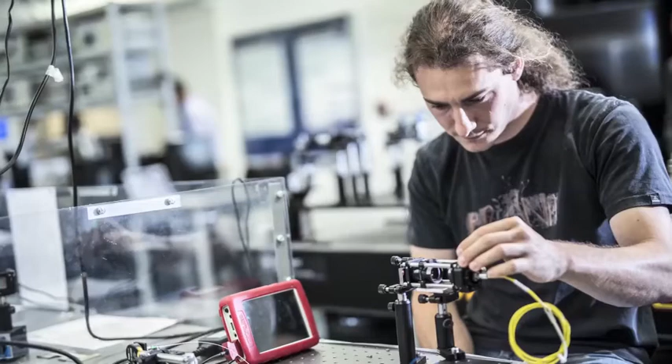Metrology is the science of measurement. The Future Metrology Hub is one of 13 EPSRC future manufacturing hubs and focuses on the measurement of features related to physical manufacturing, such as distance, form and surface characterization.

With over 70 academic and industrial partners, the Hub is active across a wide variety of sectors and works with all types of organisations, ranging from large global corporations through to small independent companies.

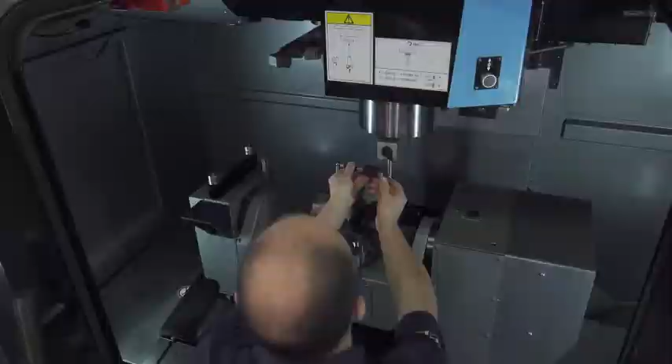Metrology is a key enabling technology essential to the modern world of high-value, high-precision technologies and products.

Accuracy in manufacturing is a fundamental requirement. Sir Joseph Whitworth, a pioneer in the field of precision engineering and standardisation, famously said, "You can only make as well as you can measure."

According to the National Physical Laboratory, traditional product verification processes typically account for 10 to 20% of finished product costs, representing over £15 billion per year in the UK alone, while over 60% of British standards involve measurement or testing.

Based at the University of Huddersfield, the Hub brings together a consortium of world-leading researchers, with spokes at the universities of Bath, Loughborough, Sheffield and the AMRC. The Hub is led by Professor Dame Jane Jiang.

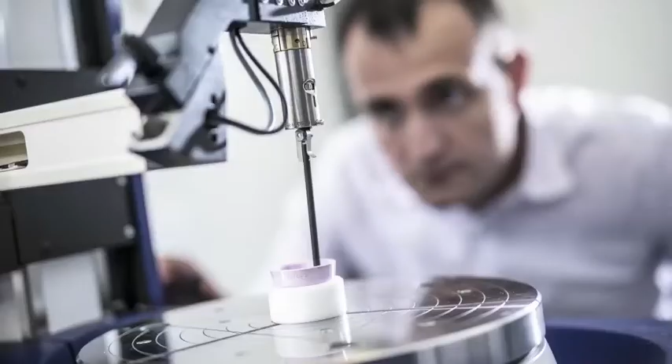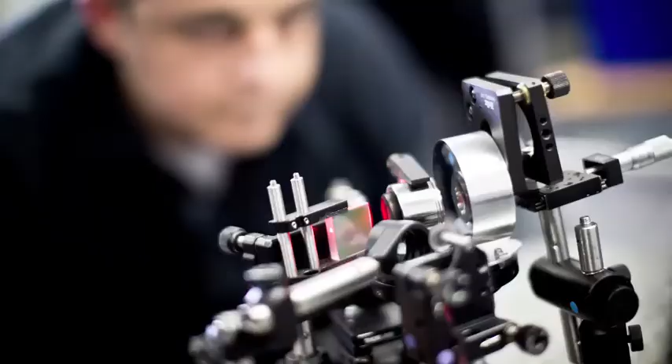The vision of the Hub is to create groundbreaking embedded metrology and universal metrology informatics, and apply these technologies across the smart manufacturing environment. Over the last 3.5 years, the team has been working together, developing fundamental science and technologies, and transforming early-stage outcomes into industry-ready solutions.

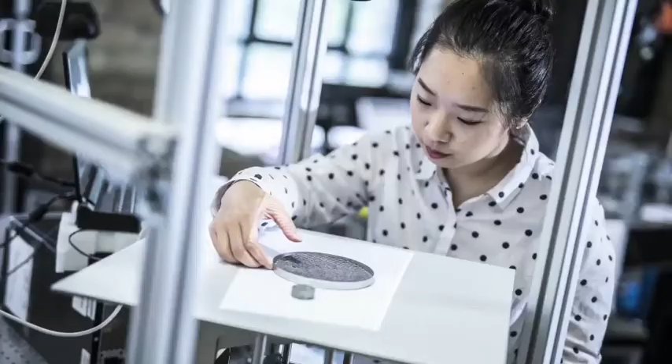Researchers at the spoke universities bring specialist knowledge and expertise, working to create new sensors and technologies for gathering data, as well as developing sophisticated methods for curating, interpreting and analysing it effectively.

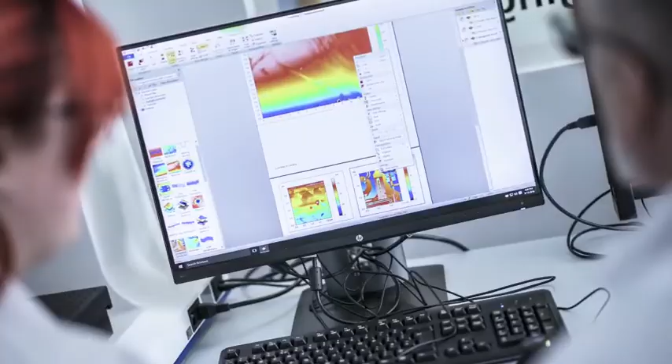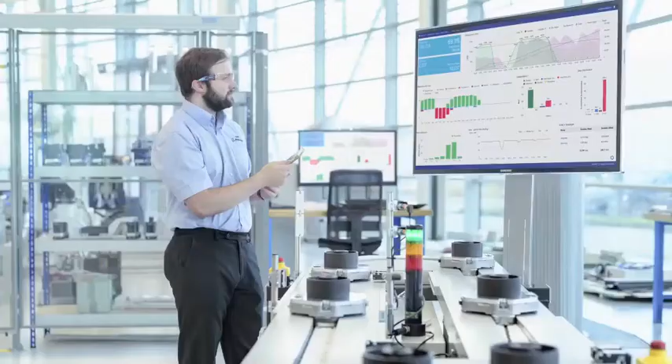The focus of research at the Sheffield Spoke is metrology informatics and its demonstration through case studies in partnership with the AMRC. The aim is to extract maximal information from product and in-process data from the multiple stages of manufacturing, towards providing a health assessment of the parts being manufactured.

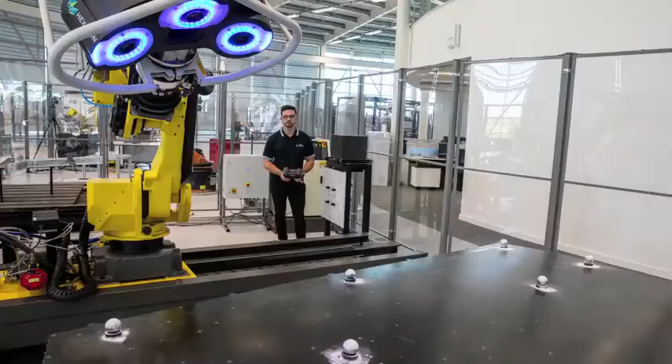We achieve this task by deploying sensor fusion and machine learning methods and make predictions on the dimensional and surface metrology parameters of the product.

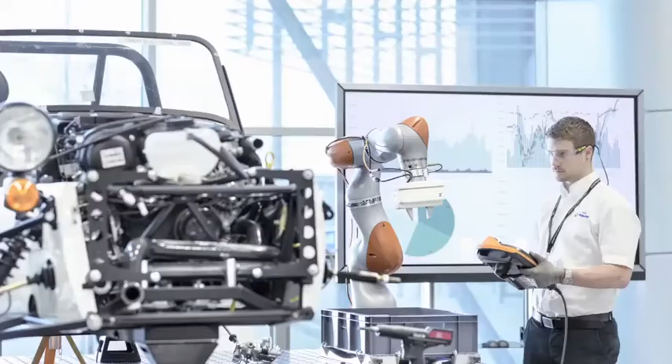This can also be thought of as providing a virtual metrology measurement, and we use this in a new strategy being developed called inspection by exception.

The key idea behind inspection by exception is that the time-consuming inspection stage is excluded for products that are predicted to categorically conform to, or categorically violate, the manufacturing tolerances.

We believe this approach has the potential to increase efficiencies in metrology-driven manufacturing.

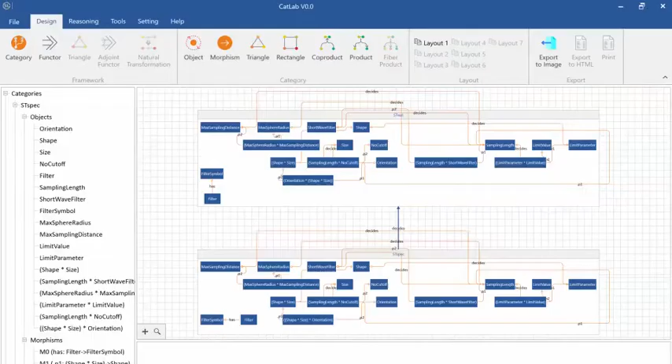Artificial intelligence systems need the same kinds of knowledge as humans to understand and describe the manufacturing environment. To achieve this, the Hub has developed an advanced language that machines can read and interpret. We call this the category semantic language.

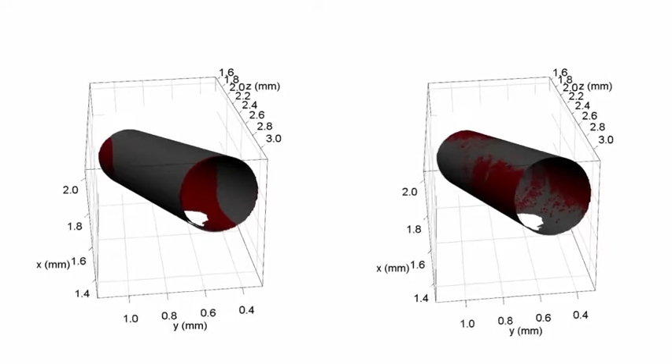Mathematics underpins the process of analysing and interpreting measurement data. Features such as linear distance are relatively simple, but as we move towards a more comprehensive measurement approach, the challenge becomes significantly more complex. Characterising freeform surfaces is particularly challenging and is a major focus of the Hub's work.

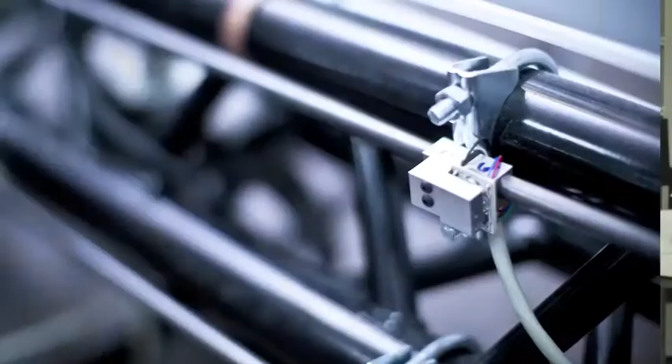For smart manufacturing, a key requirement is that future sensors and instruments must be light, ultra-compact, high-speed and robust, but with the same level of accuracy as laboratory-based systems, and at affordable cost. Optical sensors are well suited to meet this criteria.

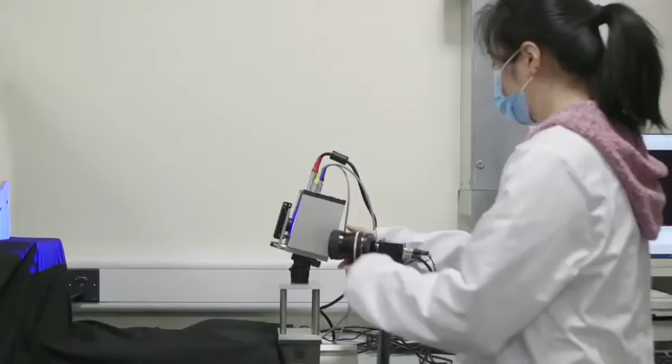Loughborough University and its spin-out companies have long been involved in developing and applying novel optical technology for industrial use. Electronic speckle pattern interferometry, fringe projection and laser vibrometry are three examples from the recent past. Our work within the Hub has two main strands.

Firstly, we're developing ultra-high-speed 3D vision systems based on fringe projection. These can be used to provide real-time feedback to guide robots in high-precision assembly tasks.

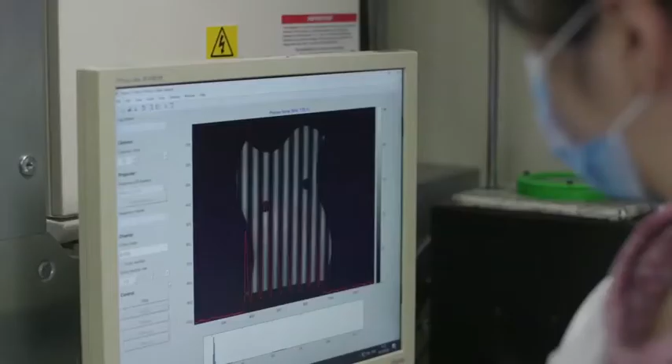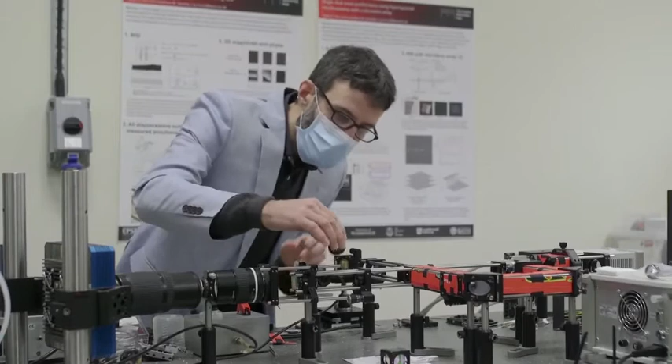The second main strand is developing a form of LiDAR. Like radar, LiDAR measures absolute distance, but with the very short wavelength of light we're able to achieve very precise distance measurements of better than 1/10 of a micrometer.

With the techniques we've developed, we can already acquire the data at a rate of 100,000 coordinates per second, which is almost 1,000 times faster than current state-of-the-art commercial systems.

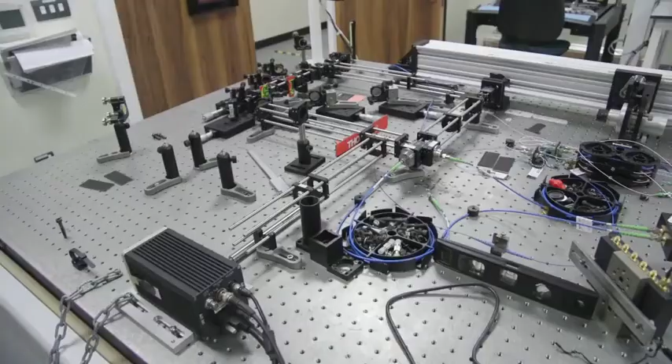What we have here is our first prototype LiDAR, or frequency scanning interferometer, as it's sometimes called. This has allowed us to demonstrate the principle, to prove the excellent distance and time resolution figures I've already mentioned, and also to patent the invention.

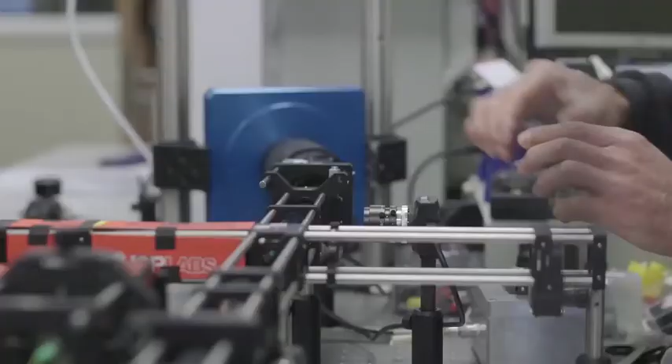However, the prototype is clearly too big for an industrial setting. We've therefore been working with one of the other hubs, the Future Photonics Hub based within Southampton's Optoelectronics Research Centre, to implement the whole concept on a tiny photonic integrated circuit.

Our research on the EPSRC Future Metrology Hub has led to innovation in the use of advanced metrology to increase the precision and automation of robotic machining.

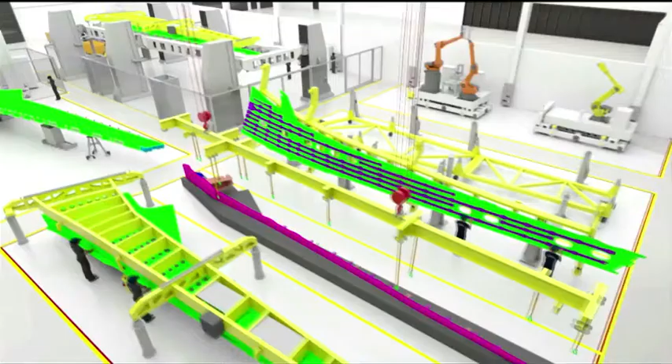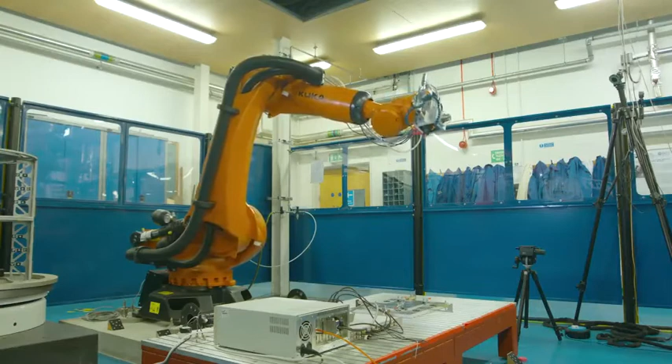We envisage robotic machining in, for example, aerospace manufacture, where large-scale components are required to be manufactured to within a few microns of machining error and precision. This would help to increase the production rates for the next generation of energy-efficient aircraft.

The problem with using robots is that they are more flexible than people think, and unwanted motions can cause machining errors of the order of 100 or so microns.

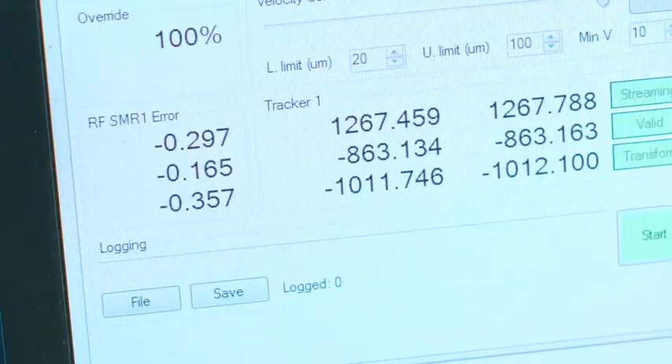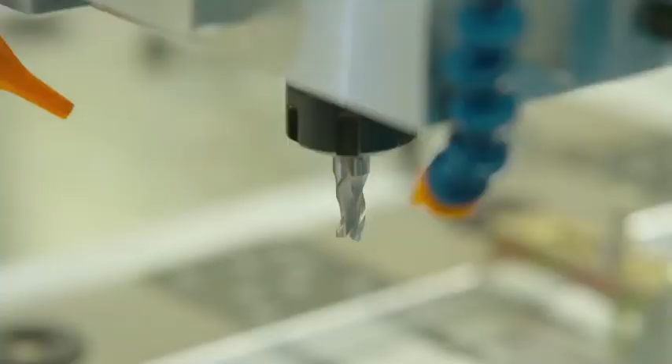To achieve the required accuracy, we need to monitor the robot, and we do this with laser trackers and other sensors. We use the feedback signals from this metrology network to excite a system of inertial actuators, and these compensate for the machining forces and unwanted motions of the robot.

In doing so, we've managed to reduce machining errors by 90%. We're now taking the methodology forward with GKN Aerospace and implementing automation in its new Global Technology Centre.

The Future Metrology Hub is working with the high-value manufacturing catapults' metrology teams and their industrial partners to ensure alignment and relevance of research. The Hub is engaged with numerous large OEMs as well as smaller businesses to ensure that the research is being carried through into the wider industrial landscape and solving challenges that business is facing.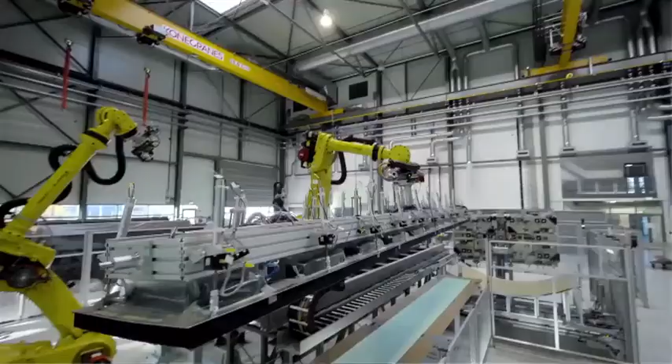Projects such as Airbus's Wing of Tomorrow programme and the Tempest Future Fighter programme stand to benefit from the Hub's work and ensure that the UK continues to compete globally in the manufacturing space.

Overall, the Hub aims to deliver groundbreaking technologies which will lead to a step change in the UK manufacturing capability.